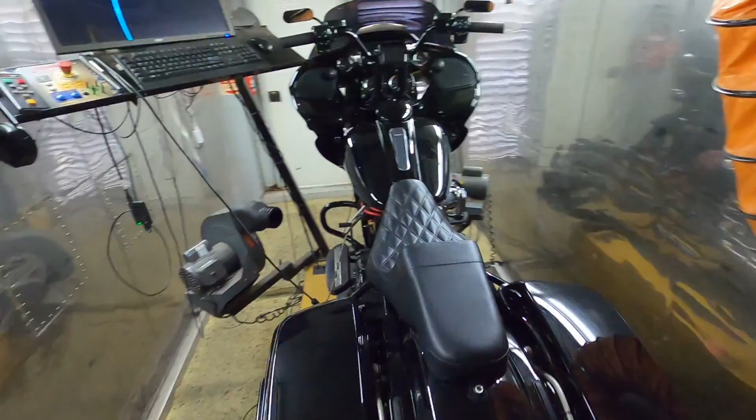Alright guys, it's up here on the dyno as you can see. My first thoughts on this HPI throttle body - it looks outstanding, let's be honest. Beautiful machine finish on here on the throttle body.

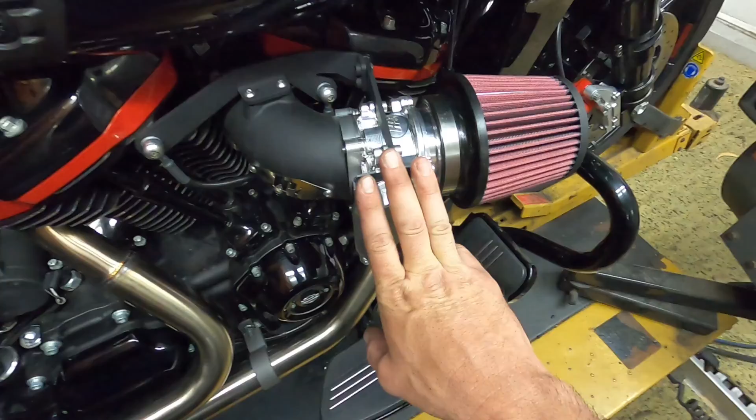I do believe there's a carbon cover for this little piece you can get, but the owner's not concerned about that at the moment. He may consider it later on. As far as fitment, it's a little bit fiddly with all the little brackets and things like that, but other than that it does fit pretty well easily. There's no fitment issues, just a little bit fiddly. So other than that, pretty great.

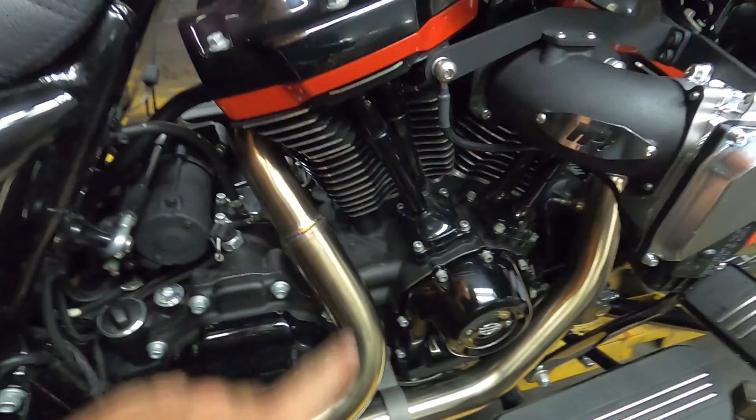This header guys, this is the first time I've fitted one and the first time I'll be tuning one, so opinion's still out on this. Just for those who want to know, this is a Fuel Moto Jackpot header, 2-in-1, and it sounds outstanding folks, straight out of the gate.

I'll throw a clip in here of the hot start, what it sounded like. Pretty excited to see how this is going to go guys. We've got some baselines there from the before setup, so let's see what this new setup does.

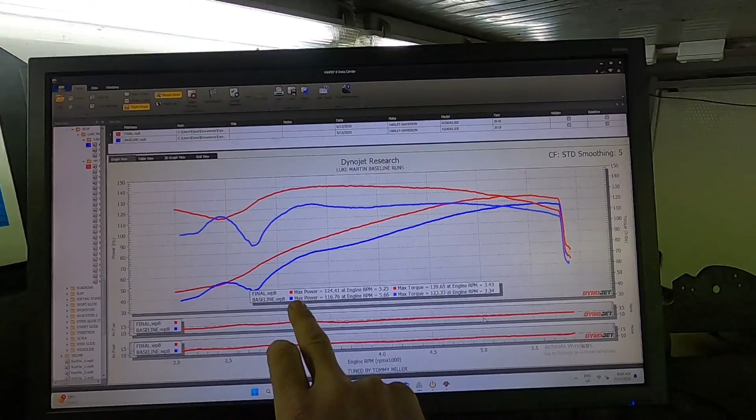Alright guys, we've got some awesome results here. So the blue run here is our baseline, we're making 116 and 123. We did have a bit of a dip going on here, which was concerning because I did actually build and tune this bike a while ago with the pipe that came off it before I swapped it, and this dip wasn't there, so something had happened.

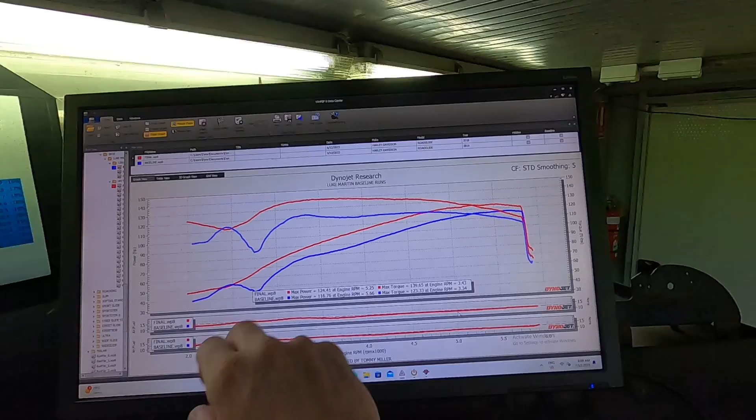I'm not exactly sure whether it was because once the tune is in and set it doesn't change, but part of the mechanical components in the engine can change, fuel injectors can fail, electrical circuits can fail, all sorts of different things, exhaust leaks and all that.

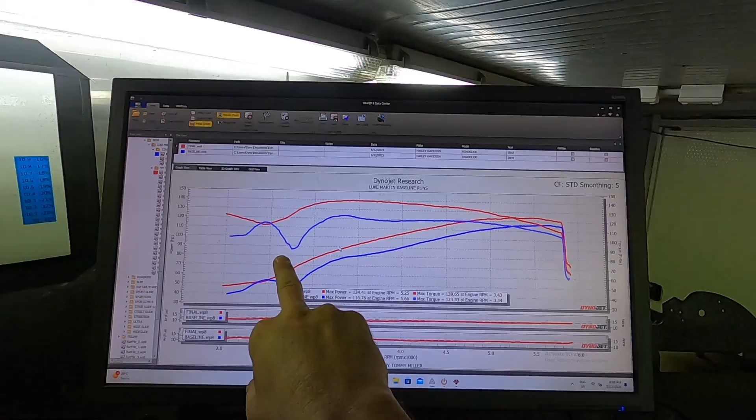So look guys, I ended up swapping out the fuel injectors from the factory ones. I put in these 6.2s just because I wasn't sure how hungry this pipe was going to make the engine. So anyway, we did have a bit of a dip.

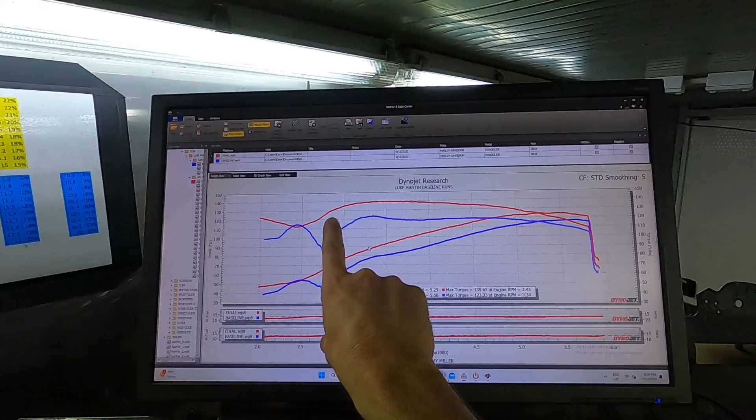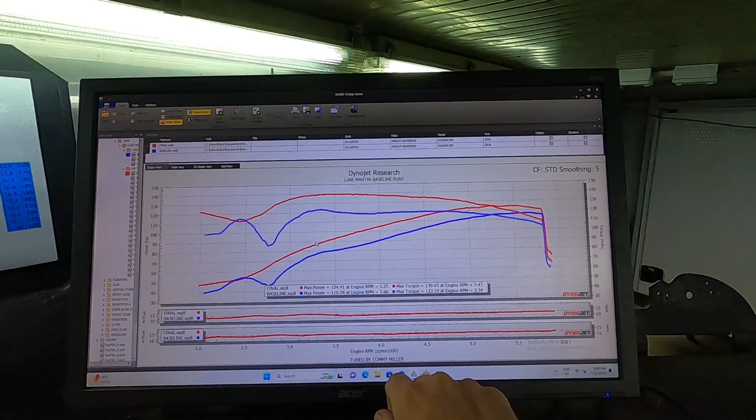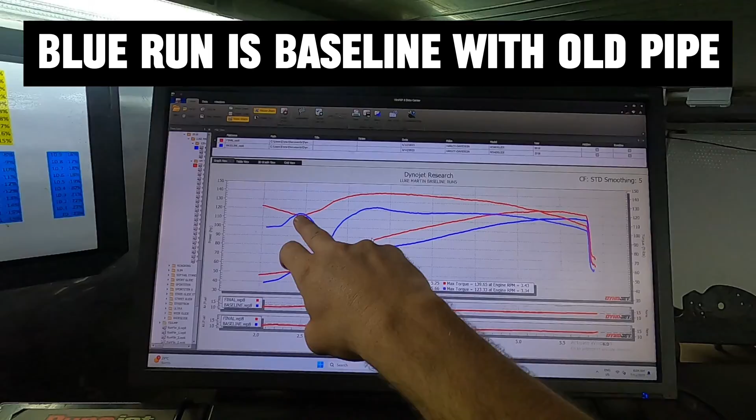Still, nonetheless, we are now up to 124 horsepower and 139, so we've got 8 horsepower and 16 foot-pounds of torque gained. Even with a bit of a dip here, all things considered, from there on it's lights out for the rest of it. You can see it's lifted the graph right through the rest of it as well.

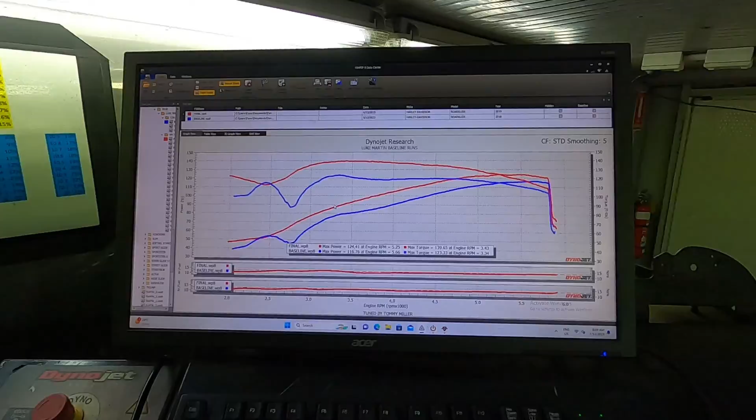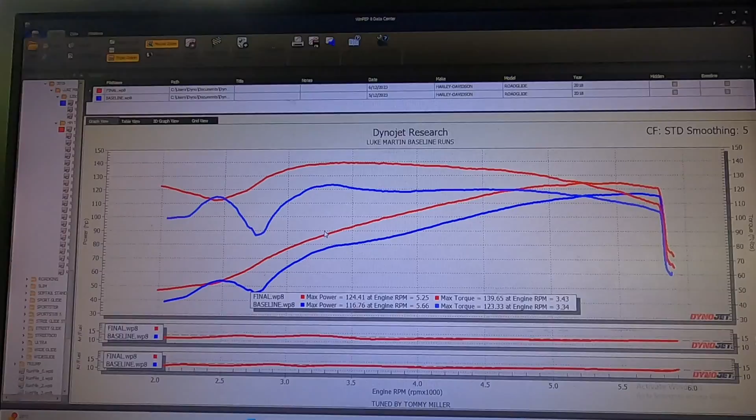Great result. I don't know how much this throttle body is responsible for any of the added horsepower. Unfortunately I didn't have time to tune it with just that on and then add the pipe separately, so we just did both at once. Nonetheless, that's a great result folks. Time to get it out on the road and see what it's like.

Righto guys, the test ride went well, no issues at all. The bike's running very, very nice. Very happy with how it's turned up. I just wanted to take this time real quick to show you guys a bit about the bike, go over it and have a look, because there's actually a fair bit going on here. As I said, I did build this one a little while ago now.

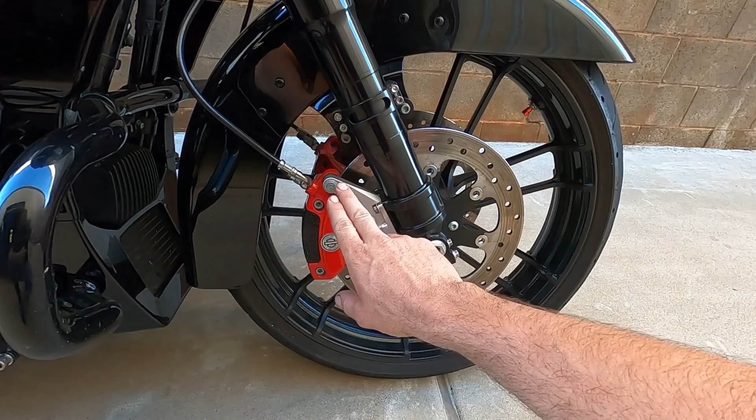It's still just about added on this pipe and that now, but yeah, we'll just start from the front. So you can see we've got the 21-inch knockout wheel there from the CVO. I can't remember for the life of me the manufacturer of this braking setup here. Really cool setup there. Obviously got the CVO chin spoiler on there.

Moving around, I'm really happy with what I did with these bars for the customer. I really focused on trying to make this as neat as possible. I even left the little console switch in here and just trimmed around it to have a nice seamless finish. So I just wanted to make it really nice and tidy.

Got the Öhlins in there, as you can see there, folks. I've got the power vision monitor here, because obviously with the T-bars you can see that we cannot see the speedo anymore, which is down there. So the customer's just got the power vision here for speedo readout and that sort of thing.

It does have a Screaming Eagle Stage 2 boom audio kit, so it's got the amplifier in there and the upgraded speakers, so awesome sound.

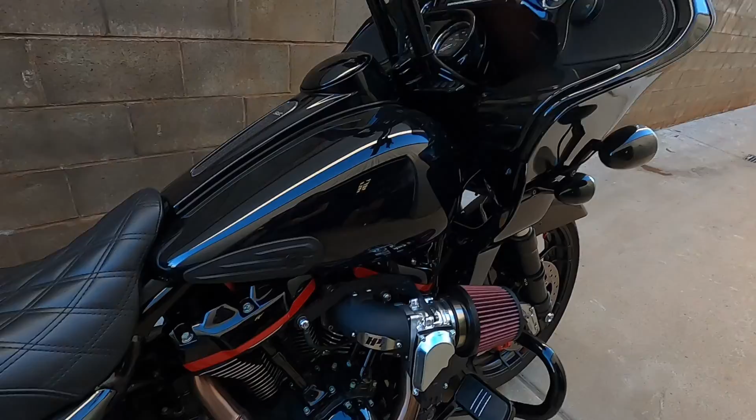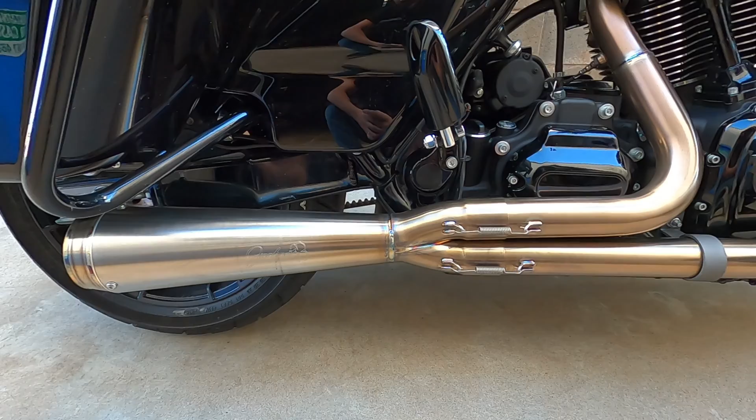As you're aware, it is a 120 cube 475 cam. As you just saw, we've fitted up this HPI throttle body and this beautiful Fuel Moto Jackpot 2-in-1 header. This is the business, folks. I'm really happy with how it looks, how it sounds, and more importantly, it fits very, very well.

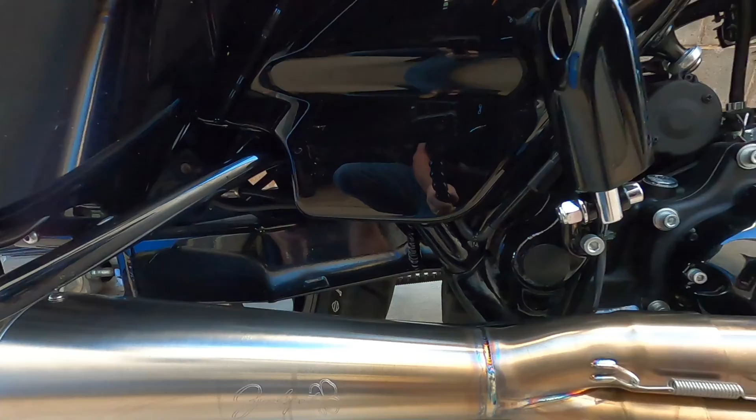No issues at all. Moving back, guys, we've got the Brock's Performance swing arm in there, so got a bit of a look there. Really, really nice piece of work on that, and obviously got the matching knockout on the rear there as well. Short bags on this one, as you can see there. We've got the Screaming Eagle remote res shocks on the back.

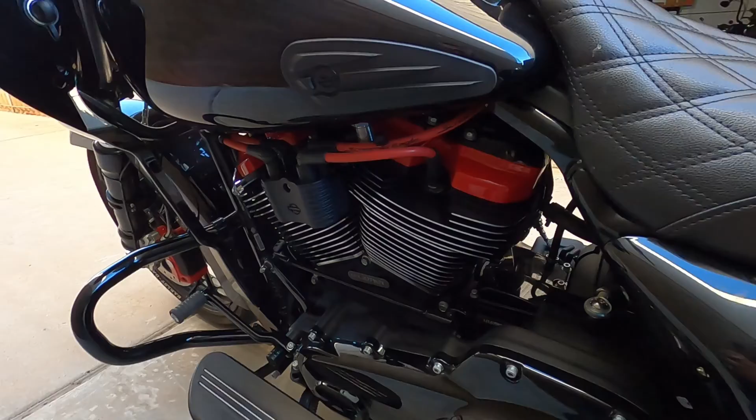One thing I do want to touch on real quick, guys, is the coil here. So this was obviously done a while ago now, but there's a little bit of trickery going on with this. So obviously, as you know, all the CVOs come with this mounted on there now, the VVT CVOs, but this was a bit of mucking around.

So what we had to do here was we obviously got the Softail coil, fitted it up, and the bike wouldn't start. I can't remember if this is a 2 ohm and the other one's a 4 ohm, or this is a 4 and the other one's a 2, but anyway, there is a different resistance in the coil. So we had to actually program the bike as a Softail to run this coil. So what I mean by that is just that's the standard calibration in the bike that just allows it to run that coil.

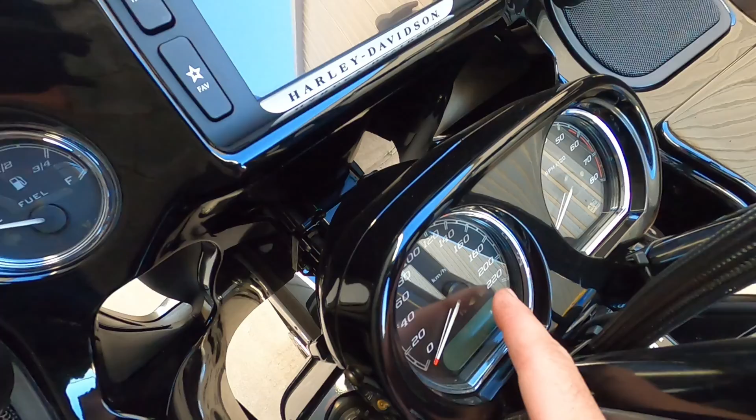So don't go thinking you can just bolt on a Softail coil to your M8 Tourer. You will have some issues unless you've got a dealership close by with digital technician, you'll be able to reflash the bike. But when we do that, folks, you do get a red light that stays on the dash. So if you can deal with having your little red BCM light, the one that's flashing there every now and then, staying on constantly due to that coil, then by all means run it.

So yeah, really, really cool bike. This is one of the first sort of performance baggers that I ever started to muck with, and to be honest, I've got a bit of a soft spot for it. I really do like this one. Just to me, it just looks really, really clean. I'm just happy with how it comes up, and this throttle body I think just finishes it off really nice.

Like, some people may hate it, but I actually don't mind it, to be honest. I'd probably be a fan if this was going to be a carbon cover. I believe the customer's talking about getting one, but that would just finish that off nicely.

So other than that, I'm really happy with how this build came together, guys. Couldn't have asked for a better customer to do it for. This guy's just an awesome customer. He's been a customer of ours for a long time, and nothing's ever really a big problem for him.

And the next step for him now, folks, he's been talking to me about leading edge stuff. So if you guys don't know what that is, leading edge do some big bore, really beautiful cylinders and really big bore stuff over in the States there. So he may be doing a really big leading edge kit to this yet. So fingers crossed he does. I'd love to be a part of that build with him and get into that. So yeah, fingers crossed, let's hope and see.